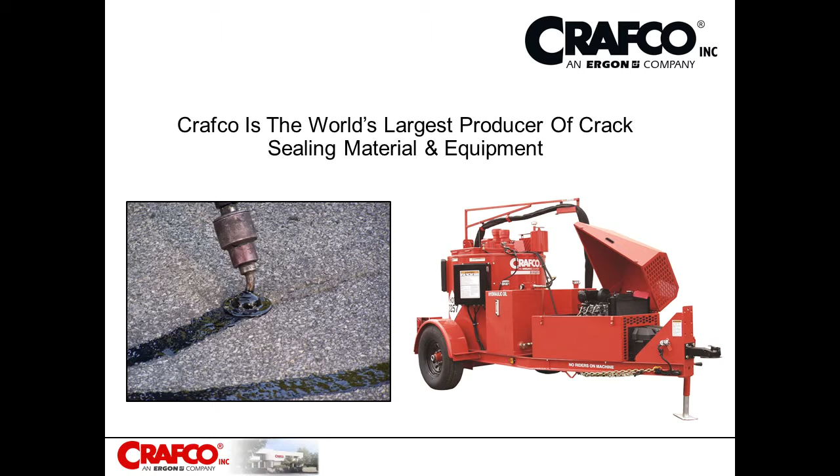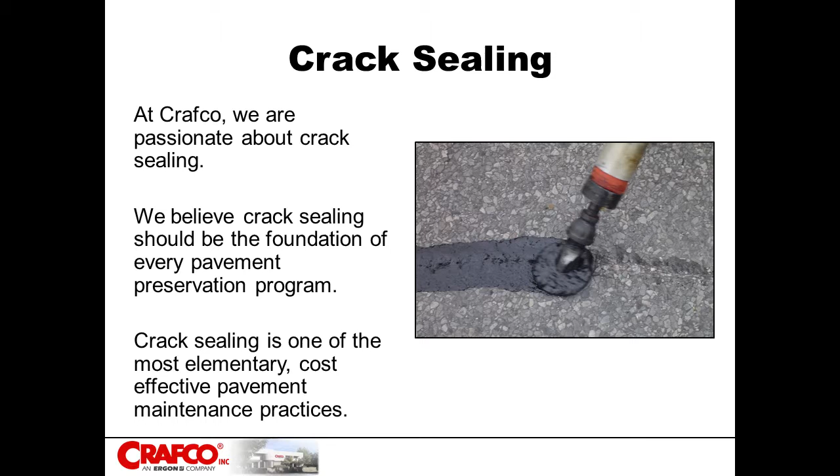A little bit about crack sealing itself. At Crafco, we are very passionate about crack sealing. We believe the crack sealing process should be the foundation of every pavement preservation program, and it's one of the most elementary, cost-effective pavement maintenance practices. I want to talk a little bit about the verb undermine as well.

Definition of undermine is to erode the base or foundation, also to damage or weaken. Now, what am I talking about here?

Back in 2013, there was an article in the Washington Post titled "Beneath the Surface, the Beltway Crumbles." This was about the Beltway around the entire DC Metroplex area, and within that article there was a little insert that talked about how a highway falls apart.

Soon after the ribbon is cut on a new highway, weather and constant traffic, especially large heavy trucks, begin to cause surface cracks. If left untreated, the cracks get deeper and completely break through the asphalt, letting water seep into the rock and soil beneath it. Eventually, this underlying layer softens, making it less able to support the pavement. Additional cracks occur more easily.

In winter, the water below the asphalt freezes and expands, buckling the road. When it thaws, it leaves a gap that, when broken through by a tire, becomes a pothole. Patches and repaving temporarily smooth the surface, but the underlying problem remains.

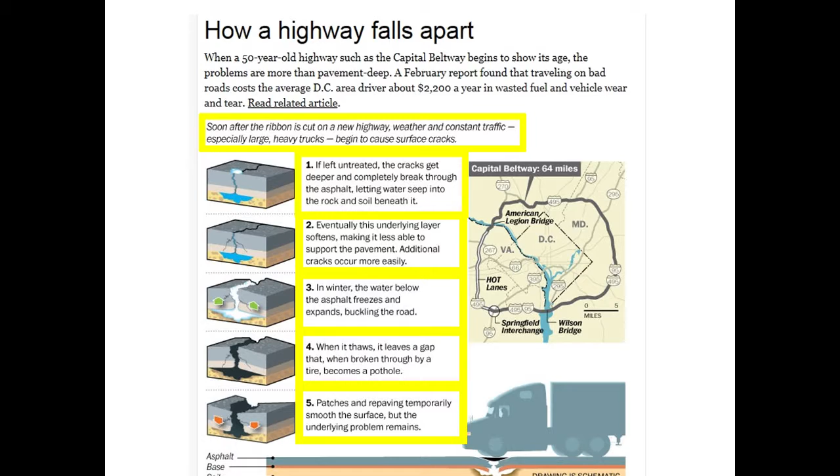Now, what's the one word that I'm talking about here? Undermine. We're basically undermining the road. Man, I'll get a rise out of you guys before this is over with. Can I hear it one more time, please? Undermine. Okay.

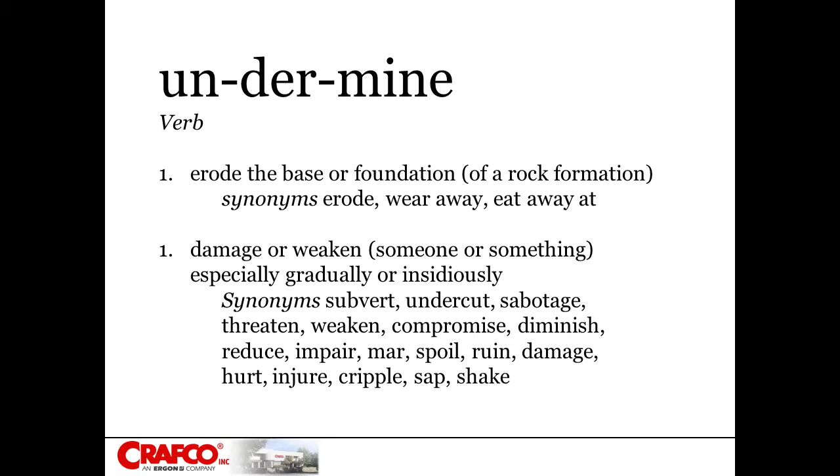I said earlier that crack sealing is one of the most elementary, cost-effective pavement maintenance practices. Now, I'm an employee with Crafco, and you say, Mike, well, that's kind of a biased opinion, isn't it? Wouldn't you say? And you know, maybe it is, but what I'm going to do today is give you examples of different agencies, contractors, distributors, about best practices and different ideas and what they're doing to maintain and preserve their roads.

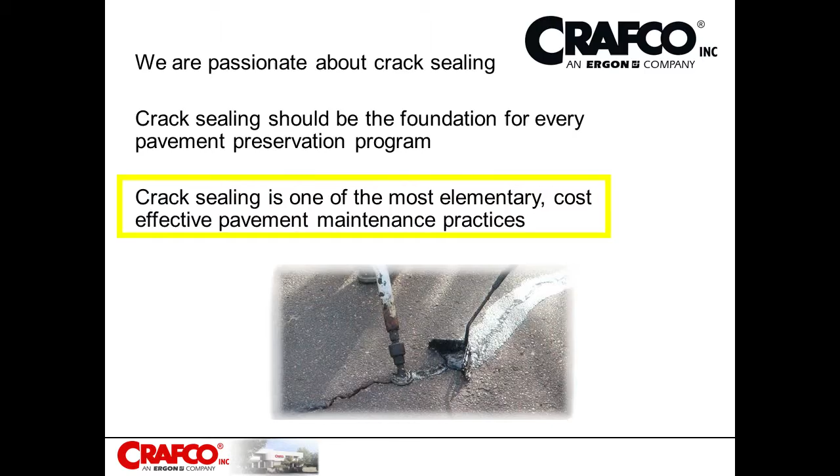Let's start with the Missouri Department of Transportation. Back in '08, there was a pavement maintenance seminar given for MoDOT. As part of the literature, it stated that if you can't do any other form of maintenance, you must crack seal. And all other surface treatment performances, including chip seals, depend on how well the pavement's cracks have been sealed.

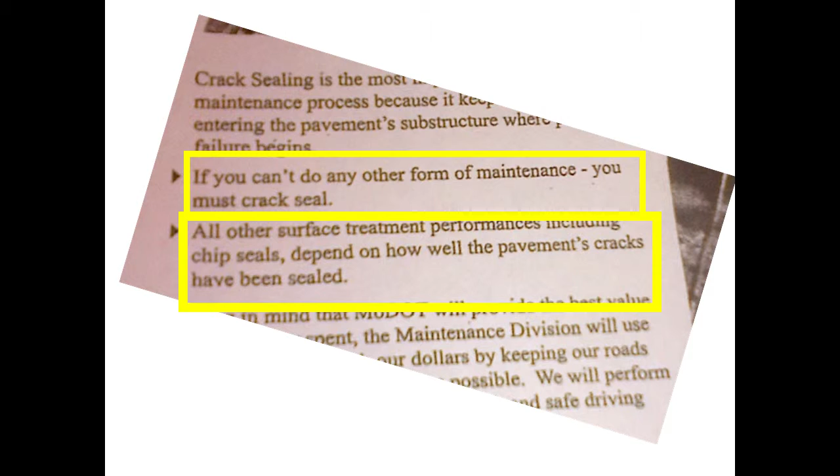Now let's get into some best practices. Liberal, Kansas, the pheasant hunting capital of the world. If you've ever been to Liberal, a small town in the southwestern portion of Kansas, around 20,000 people, it truly is the pheasant hunting mecca of the world. The city of Liberal has embraced the concept of pavement preservation.

Liberal has had a dedicated pavement maintenance plan in place since 1997. And if you drive these streets, they're old, 30, 40, 50-year-old asphalt roads, but I challenge you to find a pothole in the entire town. You will not. It's all about ride quality.

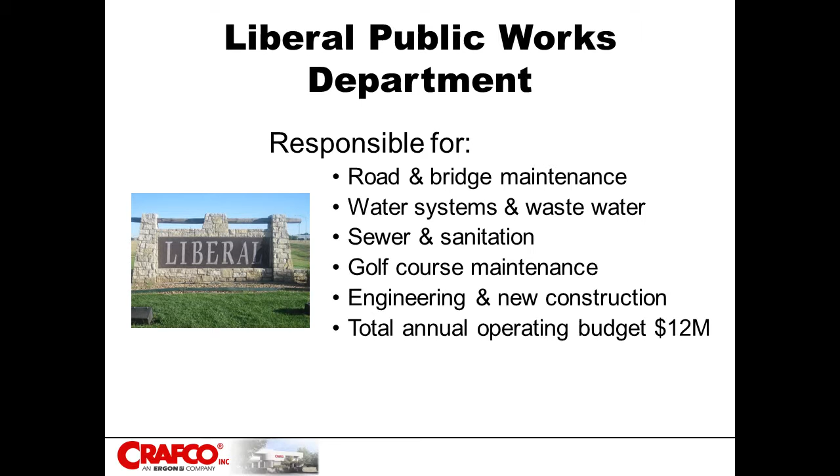I interviewed with Public Works Director Joe Seeley in December of 2013 to obtain a better understanding of Liberal's pavement maintenance practices. Joe has over 20 years of experience as Liberal's Director of Public Works. The Public Works Department is responsible for road and bridge maintenance, water systems and wastewater, sewer and sanitation, golf course maintenance, engineering and new construction, and their total annual operating budget is $12 million.

Here's the details of Liberal's pavement preservation program. 25% of the streets are treated every year on a rotating basis. The streets are crack sealed in the spring, followed by chip seal in the fall. And if you'll remember our demo that we did yesterday with the Vance Brothers demos, we were told that in a similar way, they allow those crack seal parking lots to oxidize a while.

It's preferable actually for at least a season for that crack seal material to oxidize, solidify before you come in with the surface treatment. And that's exactly what they're doing here.

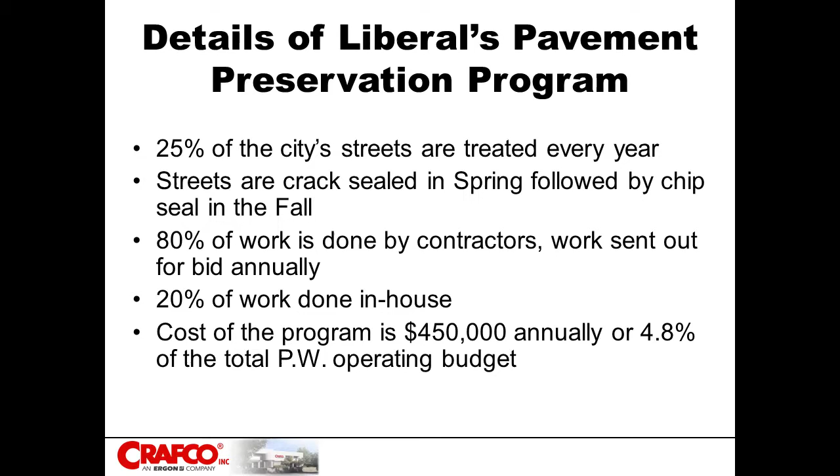80% of the work is done by contractors, sent out for bid annually, and 20% of the work is done in-house. Cost of the program is $450,000 annually, or 4.8% of the total public works operating budget. And again, to reiterate, 25% of Liberal streets and roads are crack sealed and chip sealed every year.

Step one is crack sealing in the spring, and in the fall, the surface treatment.

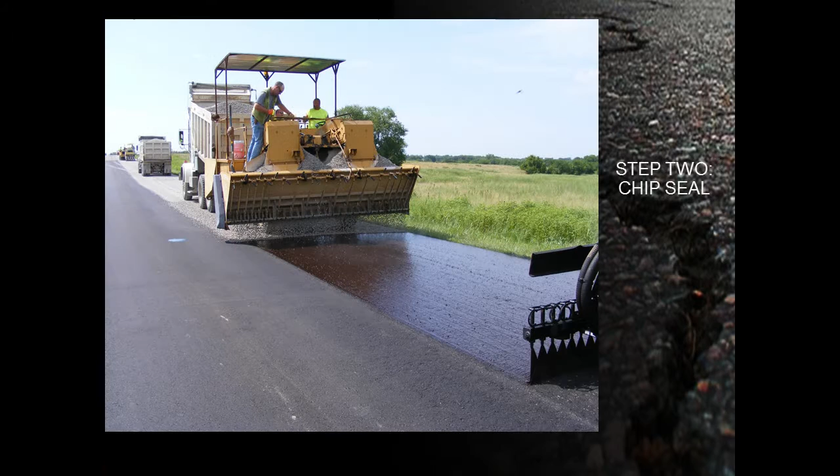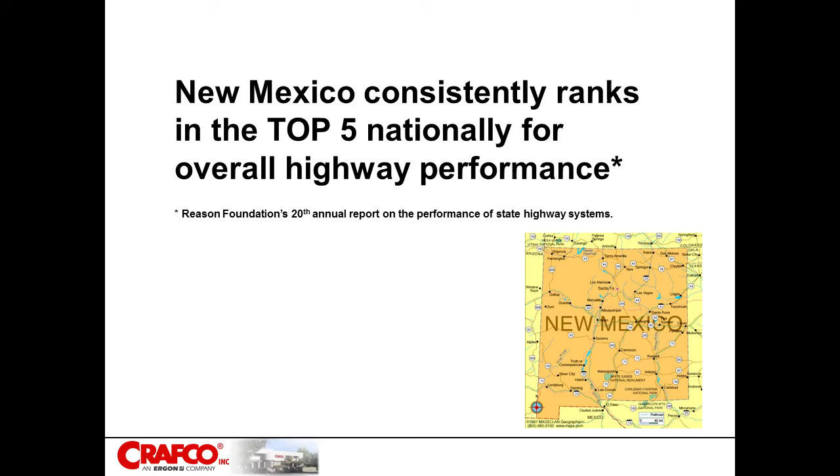Now let's talk about the New Mexico Department of Transportation. New Mexico consistently ranks in the top 5 nationally for overall highway performance.

Some notables for the New Mexico Department of Transportation. New Mexico has crack sealed their road system for over 30 years. New Mexico has also routed cracks prior to crack sealing for over 30 years, based on manufacturers' recommendations.

And something interesting here, the way contractors are paid obviously varies around the U.S. Some are paid by the linear foot, some are paid by the lane mile.

New Mexico pays by the lane mile, but they also pay by the pound quantities going into the machine within the lane mile.

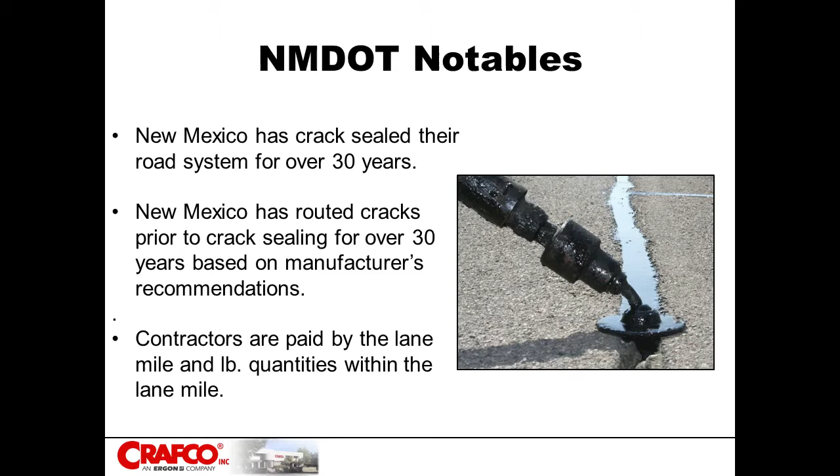Steve Dismukes is the owner of Pavement Sealants and Supply in Albuquerque, New Mexico. Steve has worked within the pavement industry for over 30 years. Here's a couple of quotes from Steve.

Engineers would never lay concrete down without installing an expansion joint. It's the same concept as with routing and sealing cracks. Any opening must be sealed to prevent deterioration to the base layer.

Regarding routing, I consider crack sealing the same concept as sealing a window in your home with silicone. You want to work the material down into the joint. Routing allows you to more easily work the crack seal material down inside the joint.

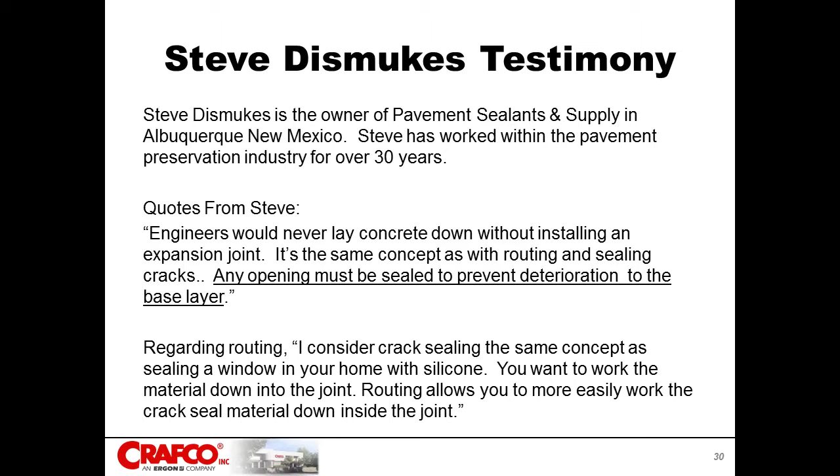Here's a little bit about the New Mexico DOT route and seal, how and why. And here's basically 3 scenarios. You have your untreated crack. The unsealed cracks grow larger because of intrusion of water and debris.

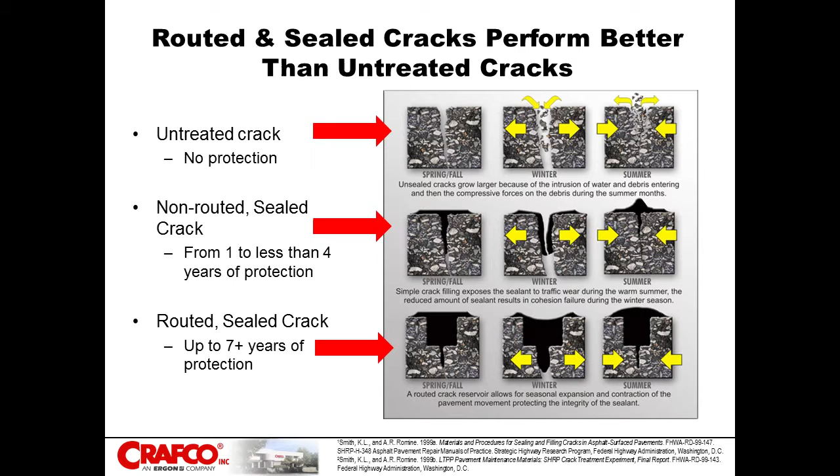Then you have the non-routed sealed crack, basically from 1 to less than 4 years protection, and then up to 7+ years with the routed and sealed crack. And a little detail on that.

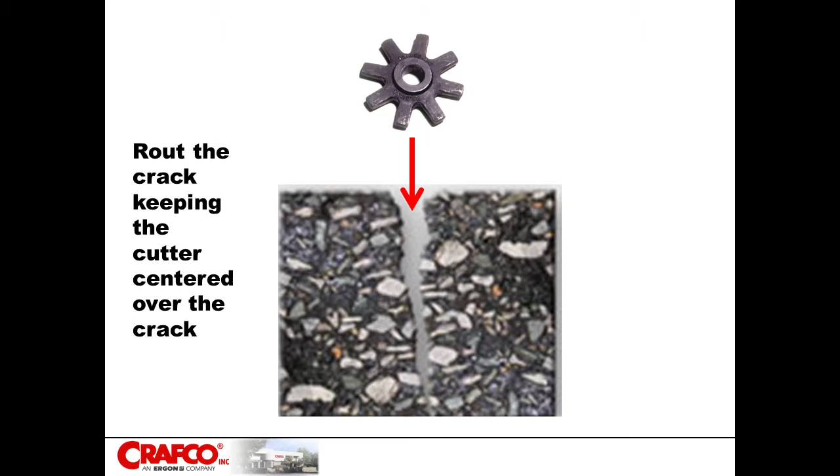You have your untreated crack. You have that router blade or bit that centers over the top of the crack. And once the routing is complete, you get a nice uniform opening with clean sidewalls.

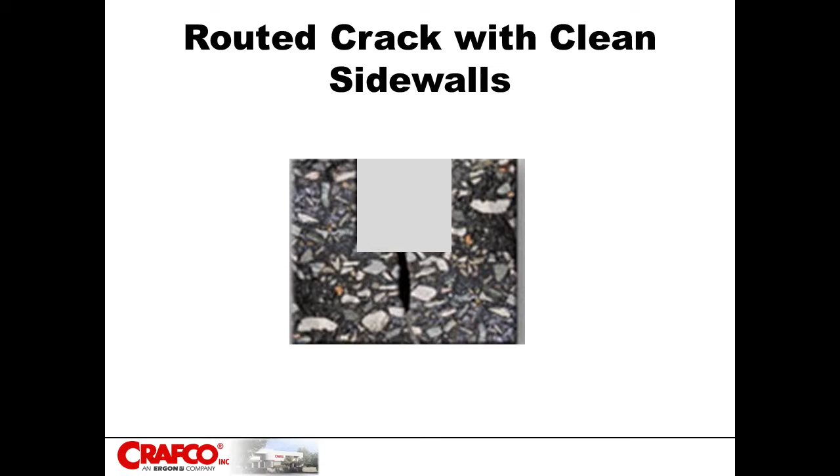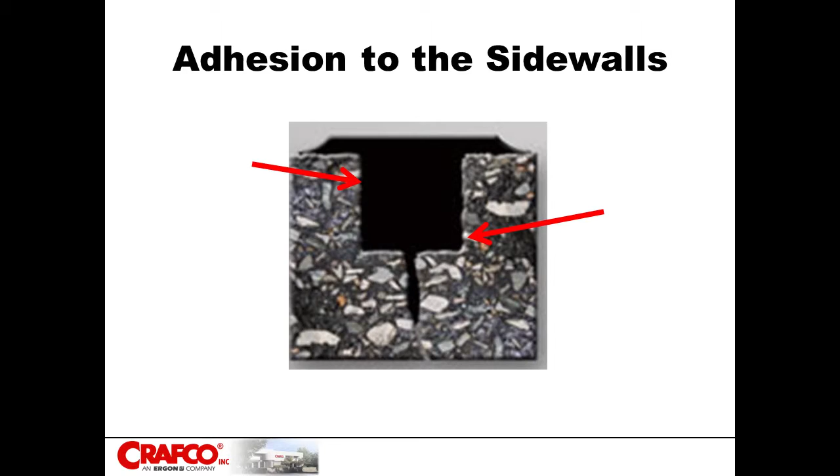The routing creates a reservoir that holds the sealant, a nice, good, tight band of sealant. You get good adhesion to your sidewalls. And also that reservoir accommodates movement.

Obviously you get expansion of the crack in the wintertime, and you get contraction of the cracking in the summertime. And whichever season you're in, whichever way that crack is moving, that routed crack accommodates for that movement.

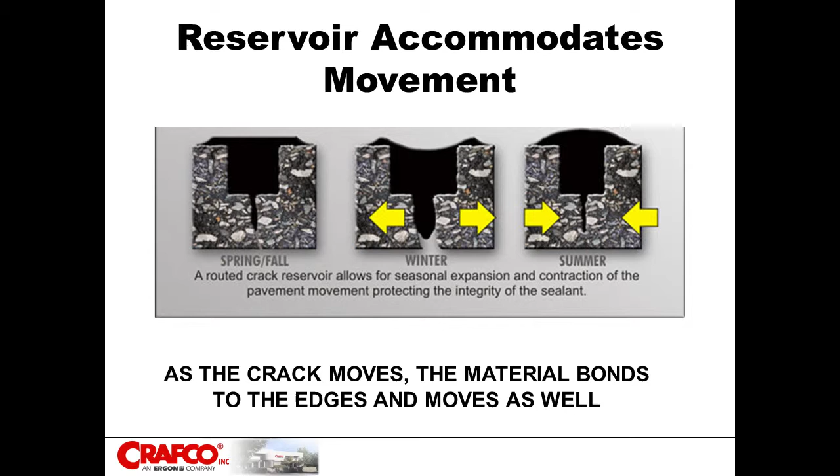Okay, Overland Park, Kansas. Mr. Ross had a really nice presentation yesterday. I actually also include Overland Park in my presentation for a few slides. And I think it's important to underline what the city of Overland Park is doing.

They really do a phenomenal job of maintaining their streets and roads. And I'm sure many of you drive those roads. They are in excellent condition down there.

175,000 population, south suburb of Kansas City. The city maintains approximately 2,000 road lane miles. 80% plus are asphalt. Their annual budget is approximately $12 million.

The new roads are crack sealed year 3, followed by chip seal during the later years. And again, the newer roads are given priority for maintenance.

I talked with Jeff Hunt back in 2014. Jeff is the street maintenance manager for Overland Park. Jeff has over 20 years experience in street maintenance. And a couple of things he had to say.

I want to spend my money on my good streets. Our experience tells us that it is much less expensive to keep a good street in good condition. Crack sealing is the most important thing that we do. Crack sealing prevents base failure.

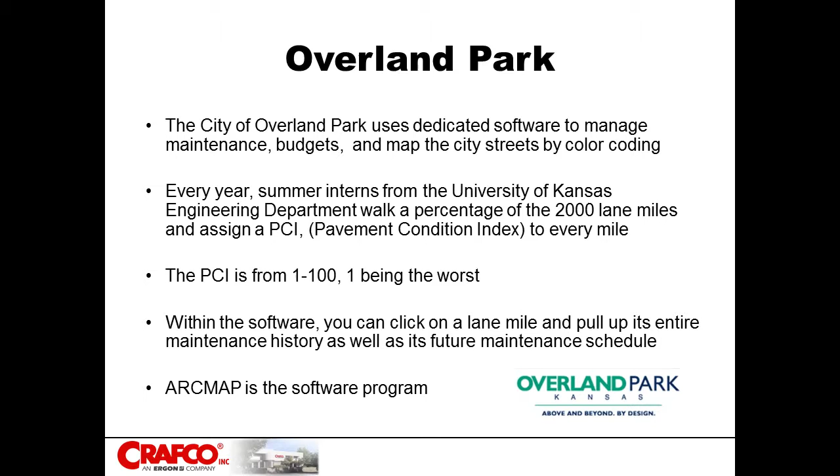ArcMap is the software program. Here's an example of their maintenance map, their color-coded maintenance map. You can see the coding and the streets that are scheduled to be treated for the different years.

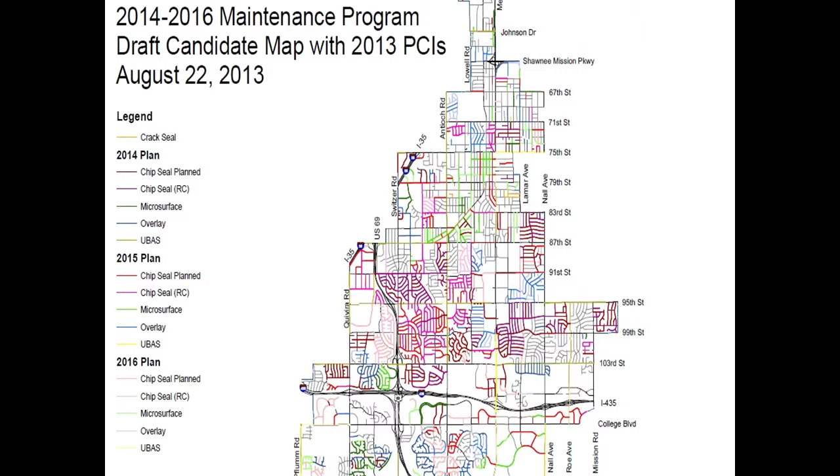Centerville, Missouri. Centerville is a small town in southeast Missouri, one of Missouri's historic towns, population of 1,875. They have a total of 19 and a half total road miles. Now, why in the world am I talking about a town that small?

I had an interview with Public Works Director Mike Smith in January 2014 to obtain a better understanding of Centerville's plans for road improvements. Centerville's objectives: they passed an $800,000 5-year bond for road improvements in 2012.

I think all of you know how hard it is to pass that type of bond. Any kind of property tax increase like that is very difficult to get passed. The bond will be financed by a property tax increase.

They basically decided they've got roughly 20 miles of road. They're going to rebuild a quarter of their roads. They're going to overlay another quarter of their roads, and the remaining half of their roads were sufficient that didn't need rebuilding or overlay. But they're going to begin a scheduled maintenance program - crack sealing, chip seal.

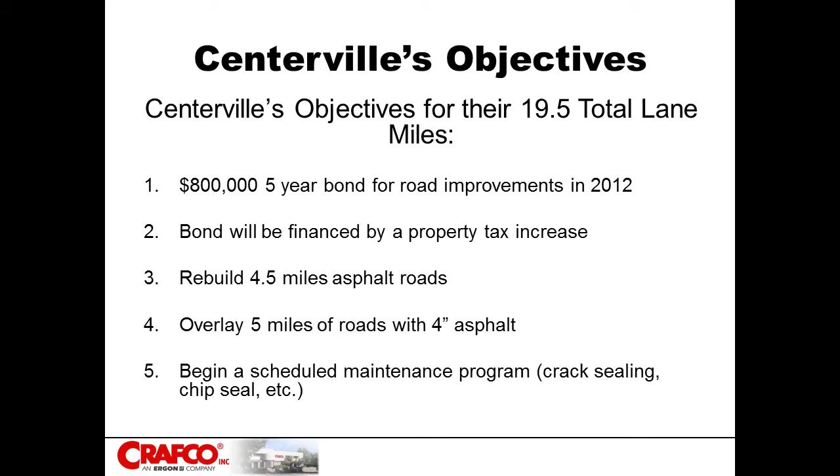So the bottom line is these people in this small town in southeast Missouri decided: we are going to have good roads. We are going to get the money, and once we have the money, we're going to do it the right way. But by gosh, we're going to have good roads in our town. What happened?

4.5 road miles have been rebuilt. They did do the overlay for 3 to 4 inch overlays for another 5 miles. They purchased one of our melters to begin crack sealing and begin a regular maintenance program of those 20 miles.

So I just saw that story. A distributor of mine told me about it, and I thought it was pretty significant, how determined these folks are down there to have good roads.

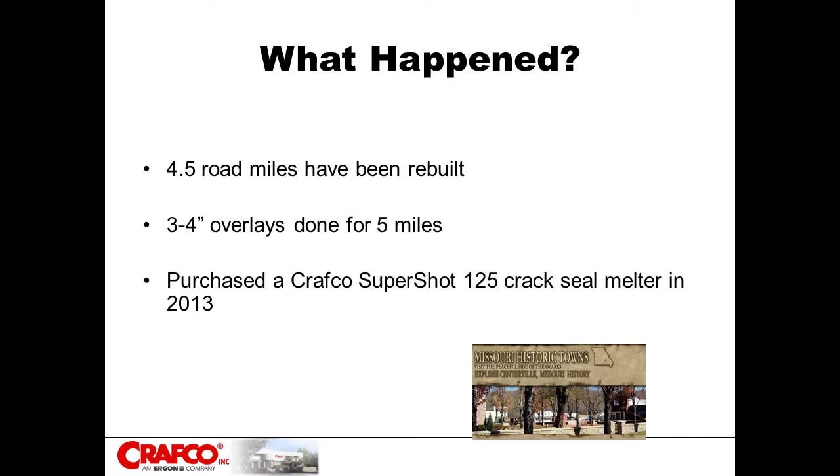Okay, let's go to the Texas Department of Transportation. Bastrop, Texas. I spoke with Roy Dill, the TxDOT area engineer in Bastrop, Texas. I wanted to talk to Roy to obtain a better understanding of the TxDOT crack seal program. Roy has over 22 years experience in pavement preservation, working for the Texas Department of Transportation.

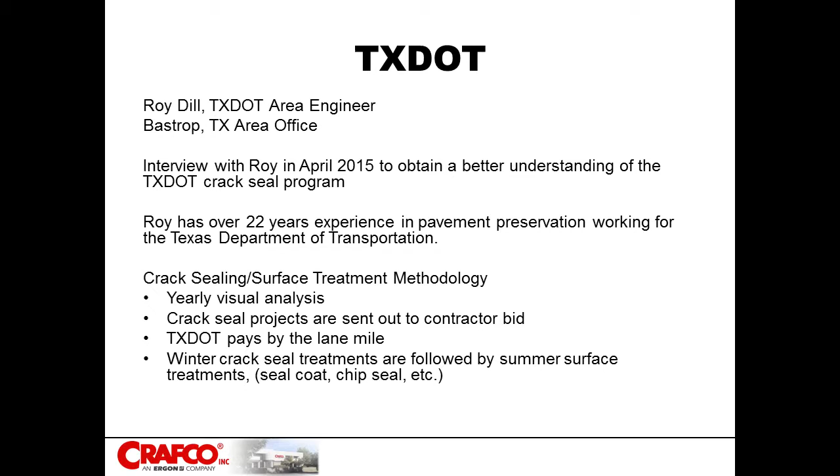What TxDOT does is a yearly visual analysis. Crack seal projects are sent out to contractor bid. TxDOT pays by the lane mile, and the winter crack seal treatments are followed by summer surface treatments.

So what does the Texas Department of Transportation have in common with Liberal, Kansas? They're doing the same thing. And they both have excellent roadways.

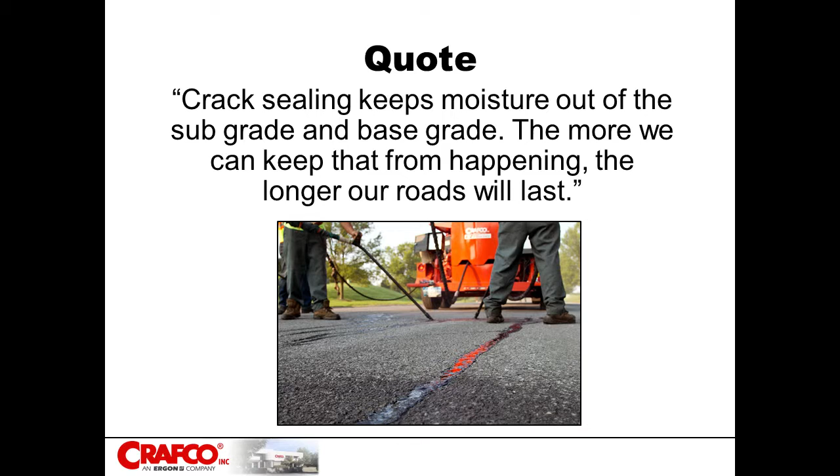One last quote from Roy with TxDOT: crack sealing keeps moisture out of the subgrade and base grade. The more we can keep that from happening, the longer our roads will last.

Regarding all of these agencies, the key thing is they all have a consistent plan. They do a yearly analysis of their roadways. Timing is very important on the different treatments. The newer roads should be a higher priority for treatments. Many of them do crack sealing, followed by their surface treatments. And what do you get by adhering to all of this? You get good results.